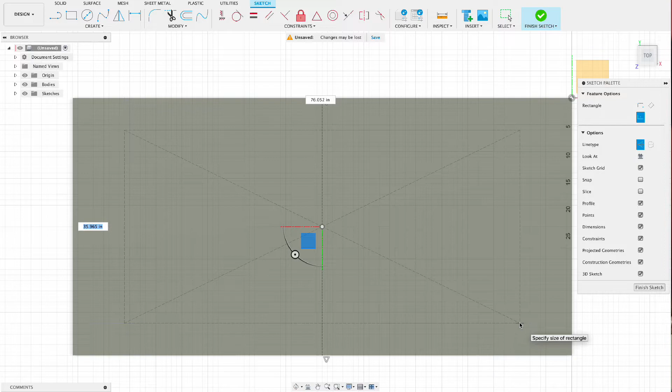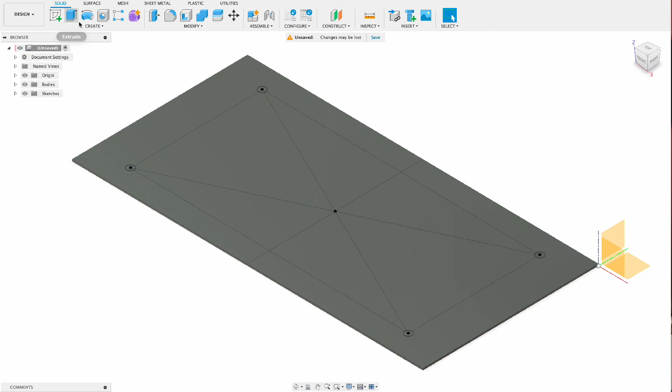So we're starting with the tabletop. This is going to be all steel construction, 1/2-inch thick steel plate for the tabletop. It's going to have round, I want to say 1.5 or 2-inch diameter tubular legs. It'll have a shelf, and this unit will roll around on heavy-duty casters.

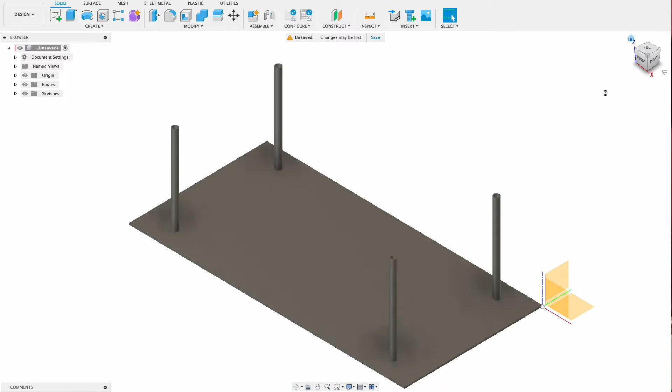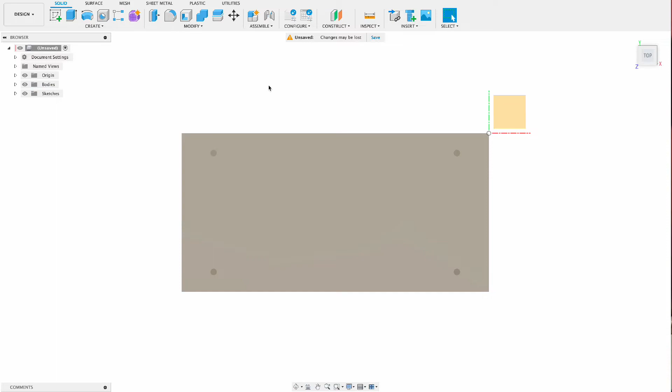So here you see me extruding up the 4 legs. I'm just using the shell command here to represent that it's tubing, round tubing. This will be all welded construction. Now I will go ahead and model the angle iron frame that the shelf will sit on.

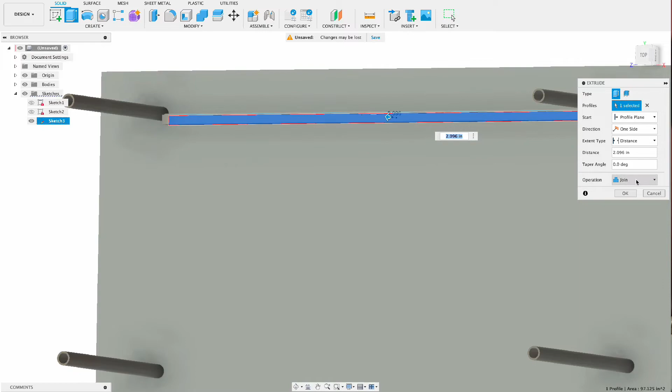Now that I have one piece of angle iron modeled, I'll simply use a copy command and basically create a new body. Then drag it over to where I want it on the other side and properly orientate it in the right direction.

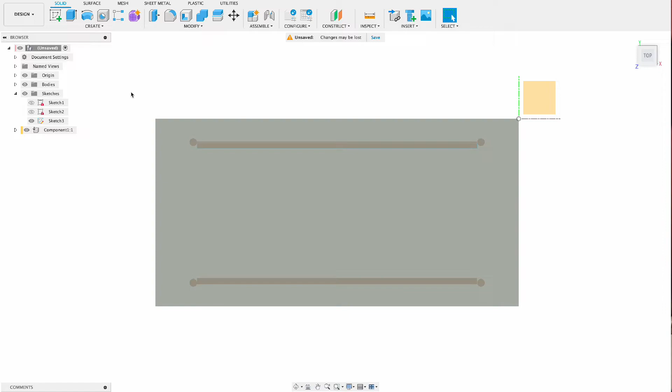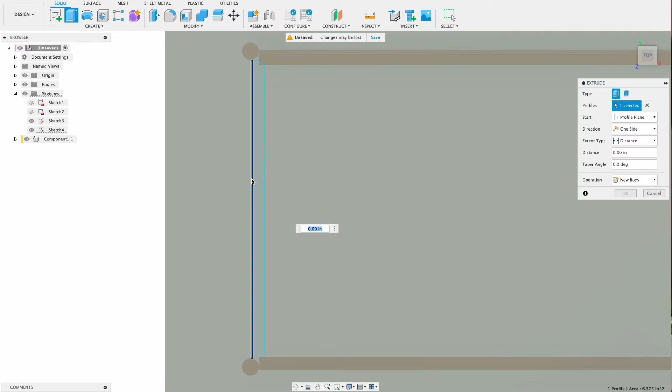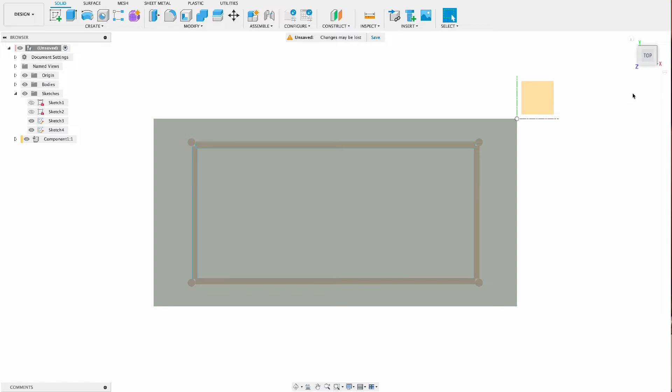Now I'll model the shorter pieces of angle iron for the left and right side of the table, following the same procedure we just did for the longer pieces of angle iron. Now using the move command, I'll select all 4 pieces or bodies and drag them where I want them to be welded onto the legs.

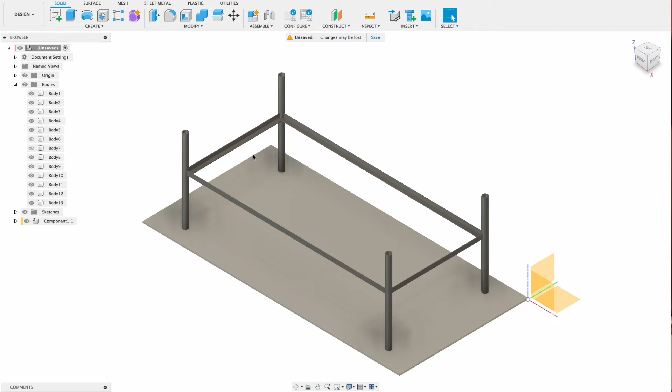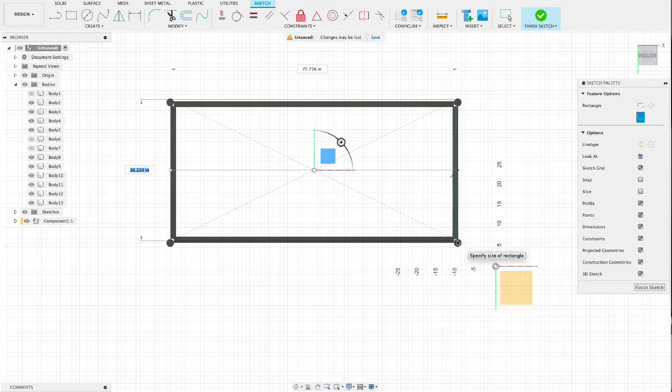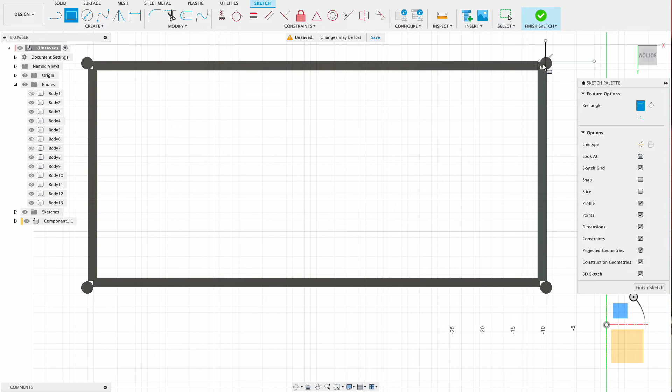Now we'll go ahead and create the shelf, and I'll simply create a sketch on that existing angle iron frame. Then once we get it drawn, we'll extrude it. It'll be 1/8 inch thick steel plate. And there's our plate, our shelf. That too will be welded to that angle iron frame.

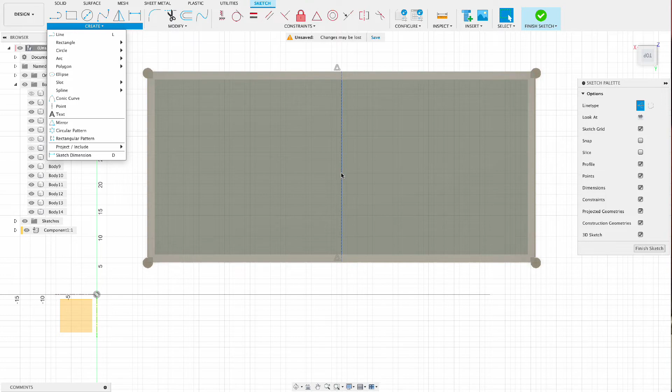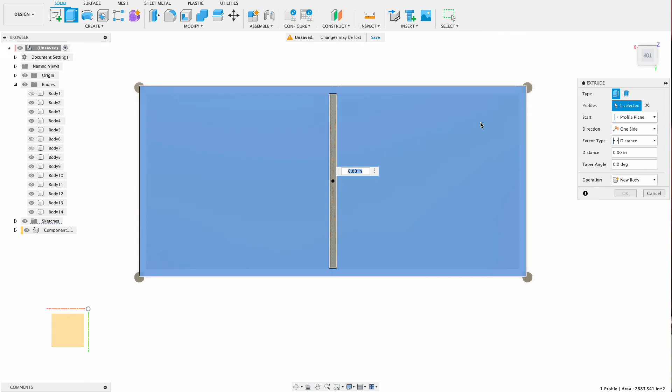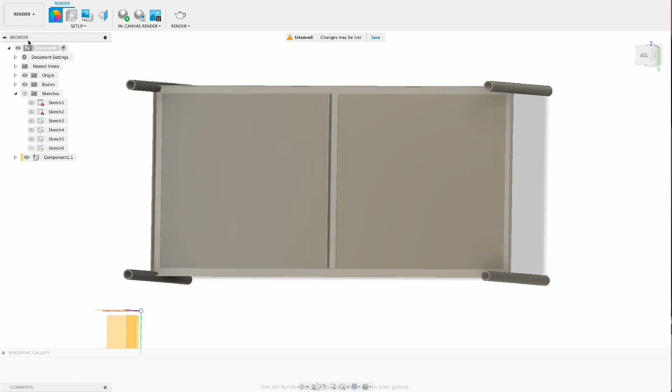What I'm doing here is adding a cross member or a support brace underneath the shelf made of angle iron. So I hid that tabletop body. Now I'll go ahead and click on the body that represents the tabletop here in a minute, and that'll allow it to reappear in the 3D model.

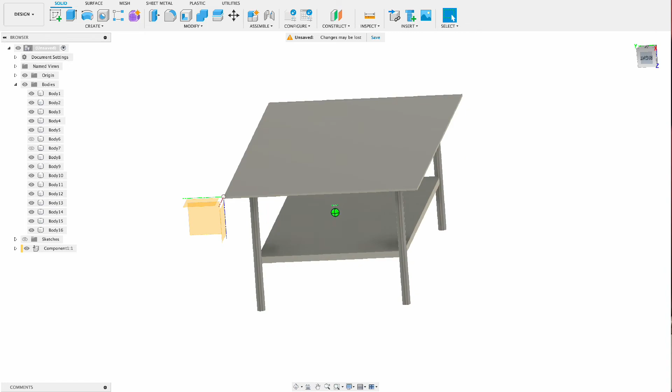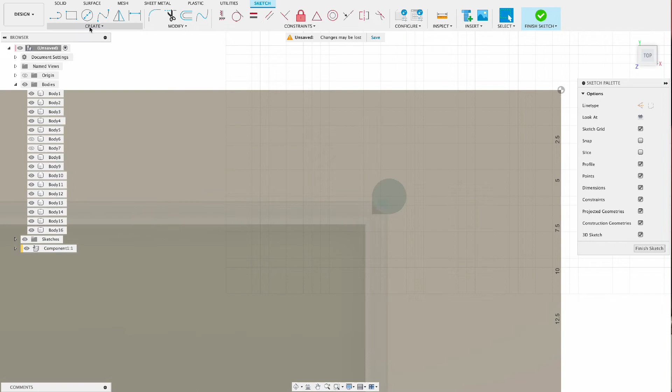There we go. The next task we need to do is to design the mounting plates or the square mounting pads that the casters will bolt onto. So there'll be one square plate welded to each of the 4 legs as feet, if you will, that will receive the casters. And so we'll simply create a sketch and then extrude up each of those plates.

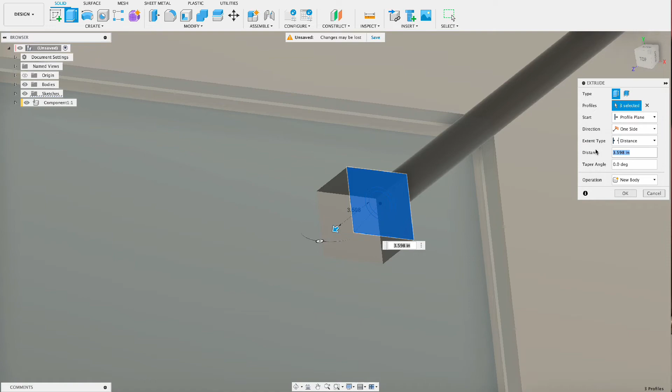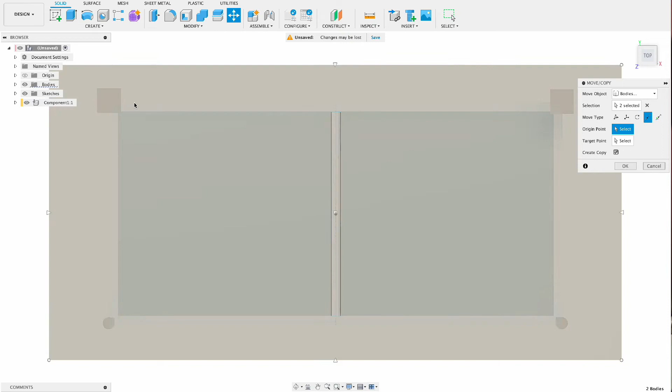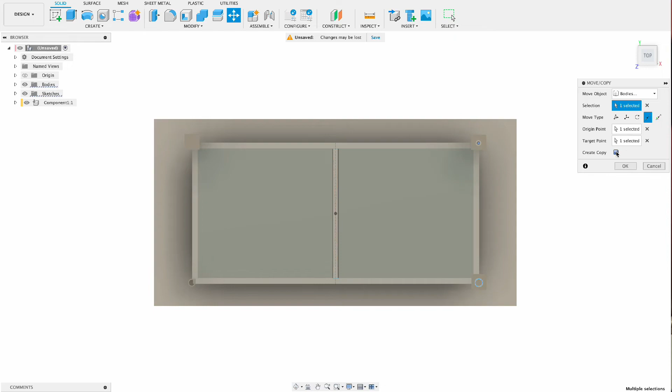And again, we don't need to model the plate over 4 times. We'll just model it once and then create a copy of that body and move the body over to each of the 4 legs. Woo! And we're almost done. We'll add the casters here pretty soon.

To speed up my workflow, I don't need to model the casters from scratch. If you have a library of 3D models, you can draw on that. Or you can use Fusion 360's link to McMaster-Carr's website where you can bring in SAT files. It's a 3D model. And that's what we'll do here for this project.

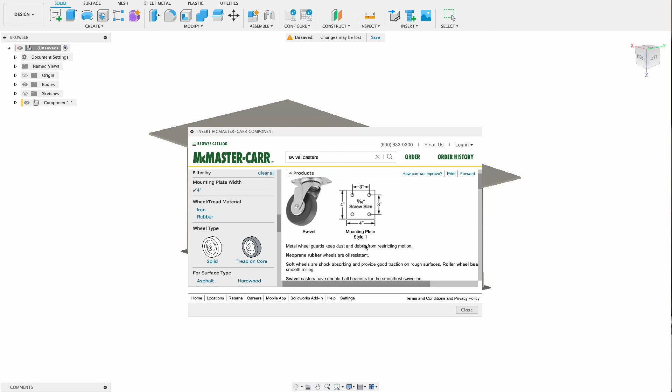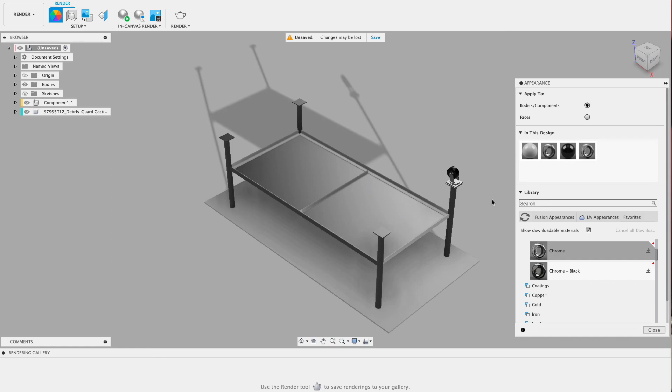So yeah, that's a great tool. Quick and easy way to integrate a 3D model. And same thing here, this is brought in as a component. So to make the other 3 casters, I'll simply copy that 1 caster as a component 3 times, drag it where I need it, good to go.

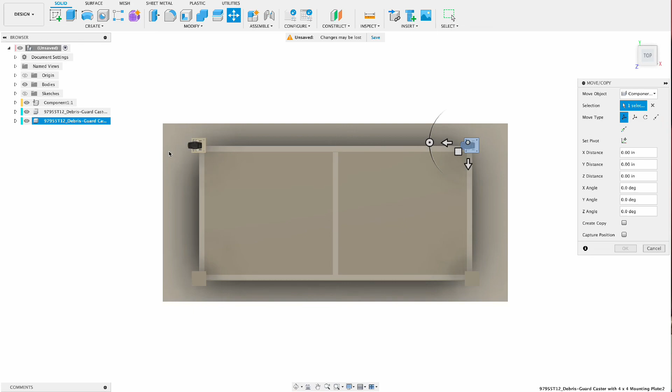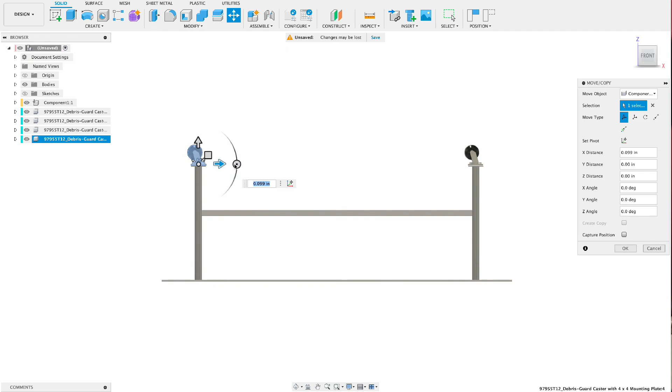That's about it for this project. Fairly simple. We rendered it in a light gray paint color. I'll show you the finished result here in a minute, and then we'll also look at an AutoCAD orthographic drawing for you.